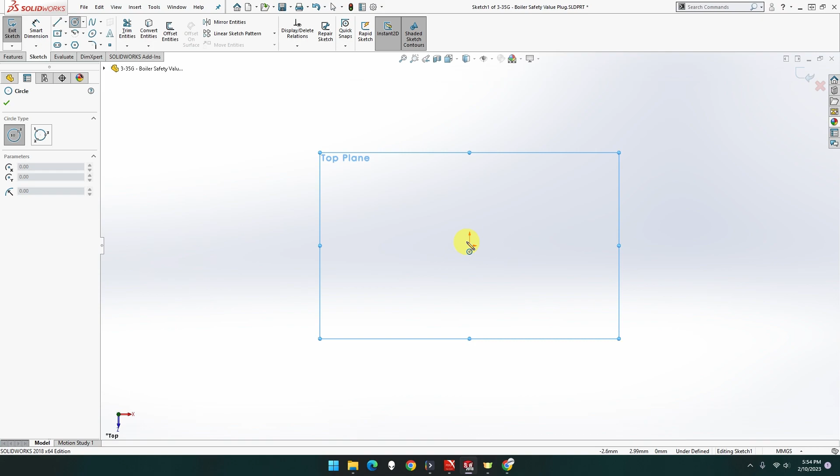Right, let's open up Home, Advanced, Part MMGS. Alright, let's go to Top Plane. Doesn't really matter which one, but Top Plane sounds good for me. Circle. Circle's going to be 10 mil. Dimension 10 mil. That's going to be a thickness of 2. Doesn't matter which mid-plane and all that.

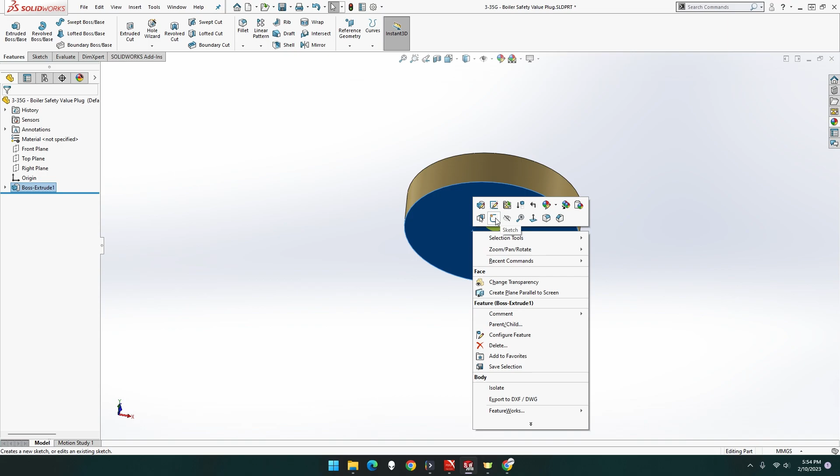Just using blind. Nope. Underneath here, that's sketch, circle. That's going to be a diameter 8. 8, and that's going to be an extrude of 6. And done. And that's going to be a thread on that of 8.

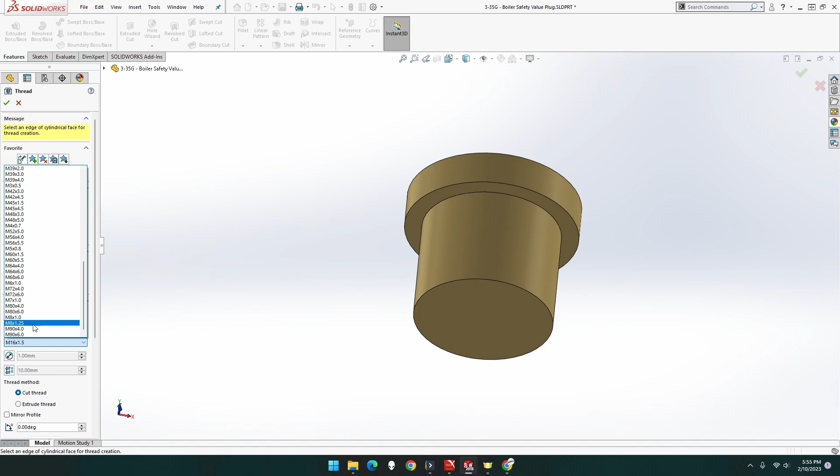So thread 8. Sounds familiar. We did one before. 8x1.25 must be. There's no other one there. Okay, so we want that one. Thank you. To that one. Trim and trim, and that's going to be cut thread. Actually, it's going to be extrude thread. Yeah, I got it right.

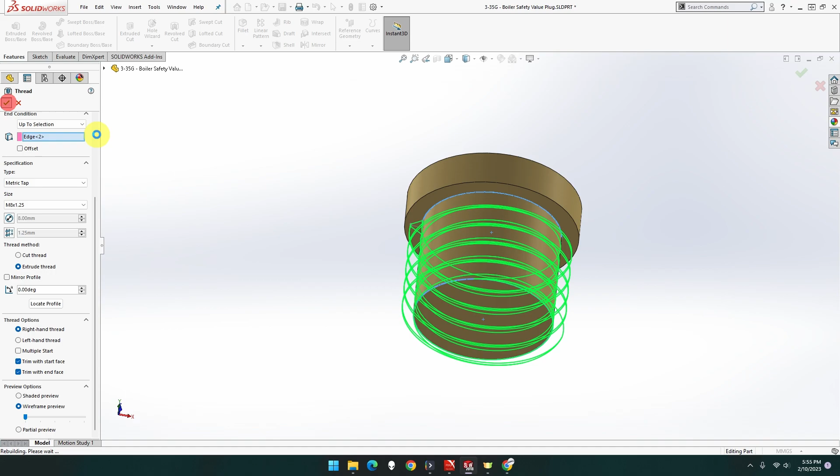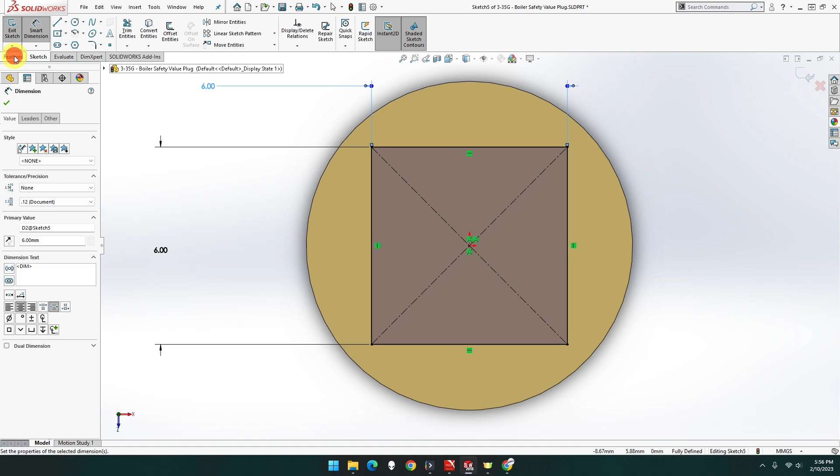There we go. Now, on this one, on top here, let's go to normal and sketch. We're going to do this rectangle. That's going to be a thing of 6 by 6, 3 high. 6 by 6. Feature, extrude, and 3. And done.

That is the part done. So that's part 3-35G, the boiler safety valve plug, done for the Clayton Undertype steam wagon.